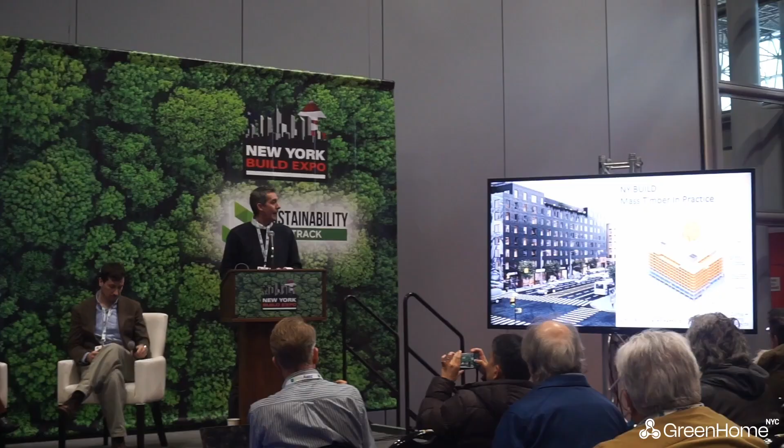My name is Matt Melody. I'm an architect with Curtis and Ginsberg Architects here in New York City. We focus on designing large-scale multifamily housing in New York City and the surrounding area. We specifically focus on affordable housing and really high energy efficiency passive house building design.

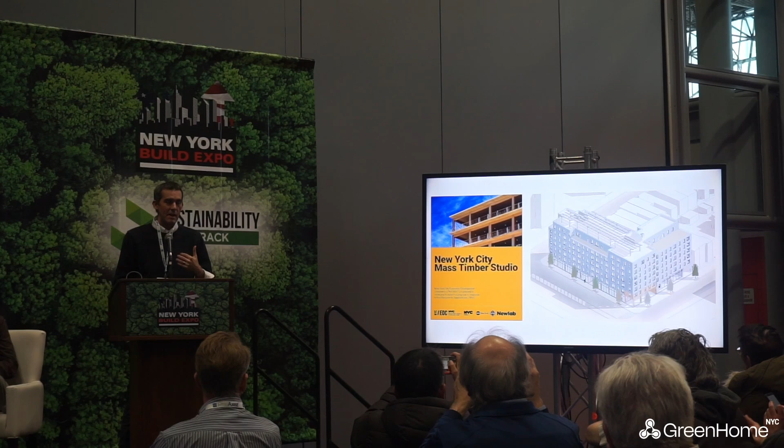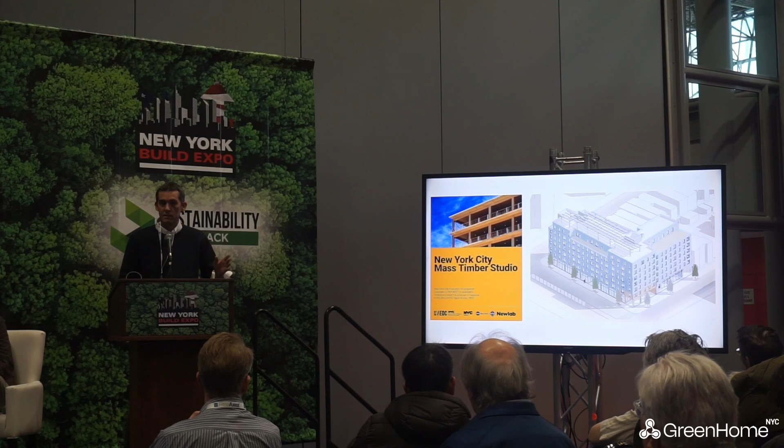So we got interested in mass timber because, like was mentioned on the previous panel, and I think even the panel before that, passive house design creates a real reduction in operational carbon, but we weren't finding a way to reduce embodied carbon. So we got involved with the Mass Timber Studio that EDC put on and did a study of how to design a new 100% affordable housing building out in Jamaica, Queens. And I'll walk through the things that we learned along the way, how you can design these sort of large-scale multifamily buildings in mass timber.

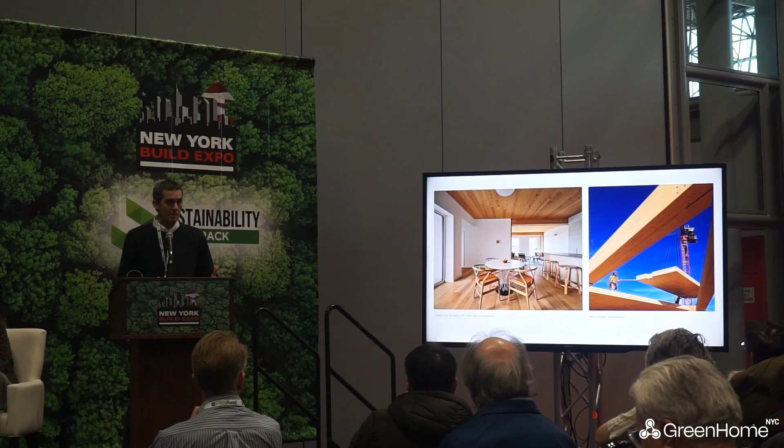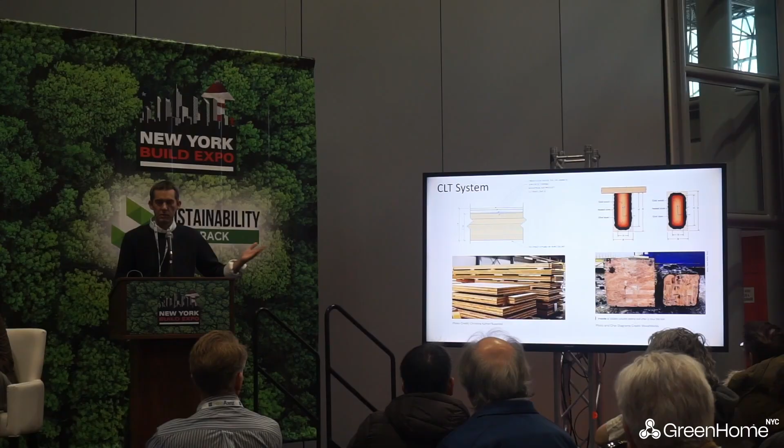So, like I mentioned, mass timber comes in a variety of flavors. We focused on cross-laminated timber, that you see in the image on the right here, and glulam options. So CLT effectively is like gigantic plywood, right, of dimensional lumber that's all been bonded together. And then glulam, we all know what glulam is, columns and beams out of that.

So when you're designing a large-scale building out of mass timber, you have roughly 3 general approaches to the structural system. You've got post and beam, which is glulam columns, beams, and then mass CLT floor panels. You have an all CLT system, which is the walls and the floor are all CLT mass timber, or you have a point supported system, which is glulam columns and then CLT slabs spanning in 2 directions.

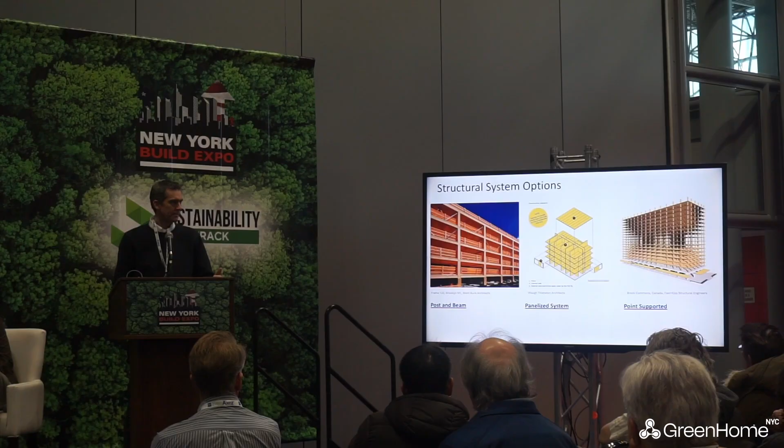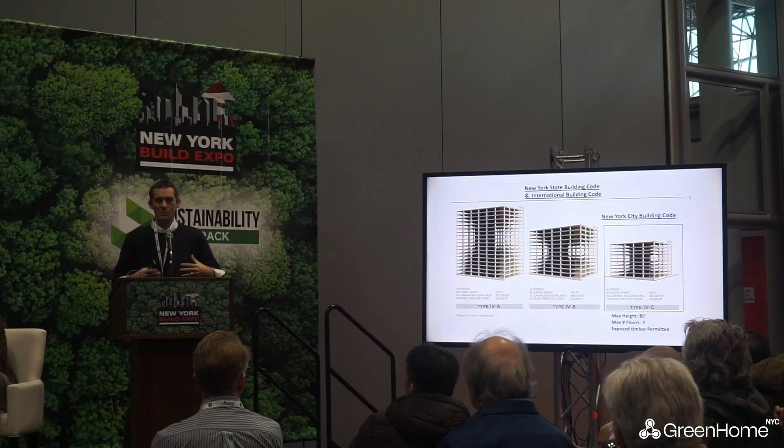New York City Code, as I mentioned, currently allows what is effectively a modified type 4C construction. So we can get up to 85 feet of mass timber, 7 floors within that. The International Building Code, the new New York State Building Code, allows for a bit more height variation in mass timber, but for New York City, we're a little more dense, so we're a little more conservative on it currently.

So, when designing the building out in Jamaica, Queens, we maxed this out. We have a cellar, parking, and ground floor commercial that is cast in place concrete, and then 7 floors of mass timber up above that.

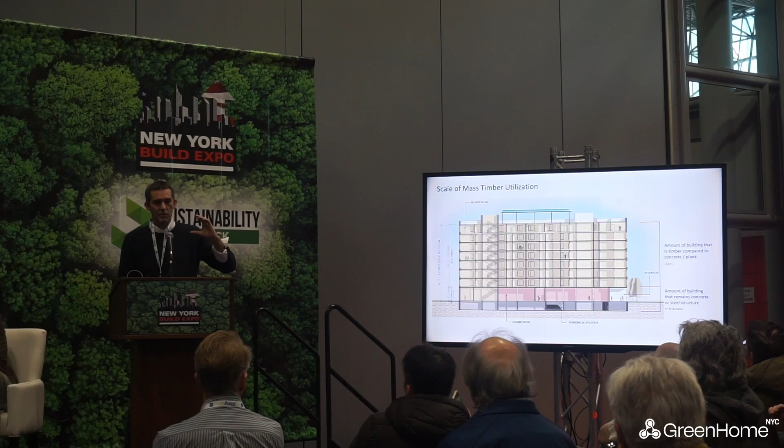I'm going to pause a minute, and since we focus on affordable housing, I'll give a little intro on how affordable housing design works and how that integrates with mass timber. In New York City, affordable housing is governed by the Housing Preservation and Development Agency, HPD, and they have some very specific design guidelines that go above and beyond regular building code. So, props to HPD, they do that because they want to make sure that affordable housing is also good housing.

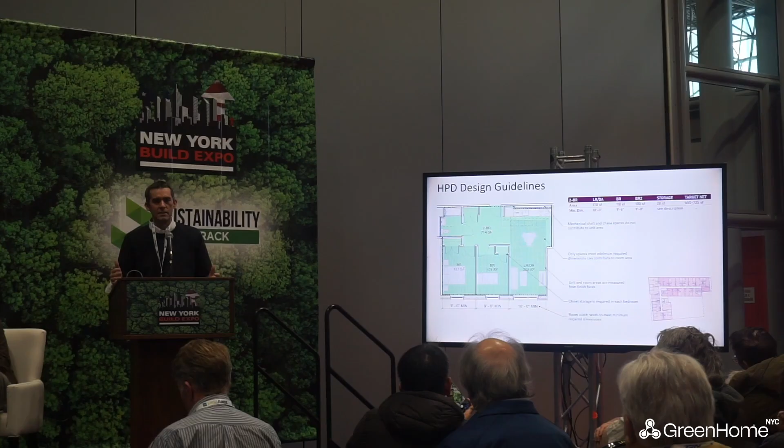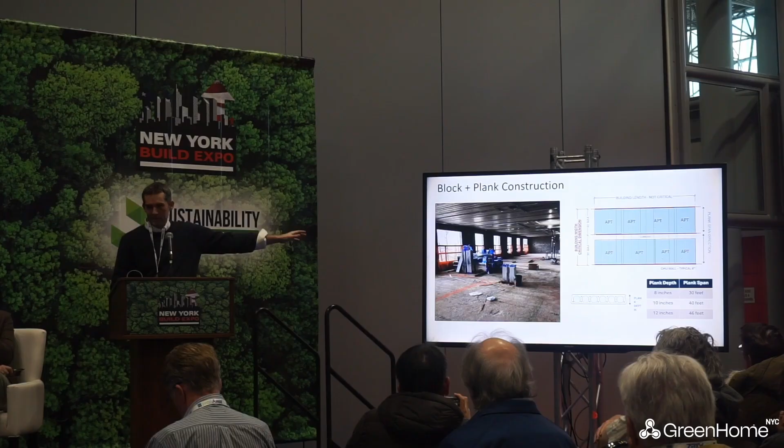We have very specific room dimensions, areas, and unit areas to make sure that the apartments are really livable and right-sized for families. So we have to meet all of those design guidelines in addition to building code. A lot of affordable housing in New York City is built out of concrete precast plank structures with CMU walls. So you have these big, column-free spans throughout the building, and that's sort of what the design guidelines are based on. So they're not used to dealing with a lot of columns.

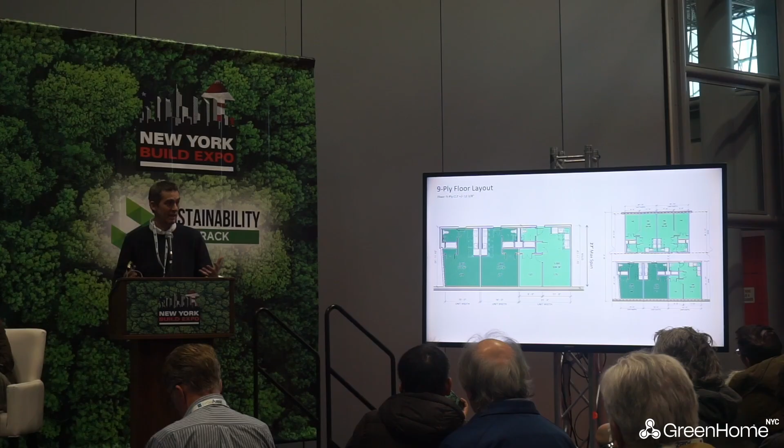So, you're going to design an affordable housing building using CLT. The first system we looked at is a 9-ply CLT system, so the thickest you can get. It's got a long, roughly 27-foot span, very similar to the precast plank approach. We could fit the design guidelines, the apartments fit out perfectly fine within that. The only consideration is that 9-ply CLT is not all that standard, not all the suppliers provide a 9-ply system, so we were somewhat limited in who we could go to.

Another option is a 7-ply CLT system. It's a thinner CLT panel, the span is not quite as long, so we flipped that and spanned that between demising walls, and it works out pretty well for 1-bedroom apartments in an HPD design guidelines setting. When we got to the larger apartments, the 2 bedrooms, the 3 bedrooms, the span limitations weren't really working with us, so we started to run into some inefficiencies and conflicts there.

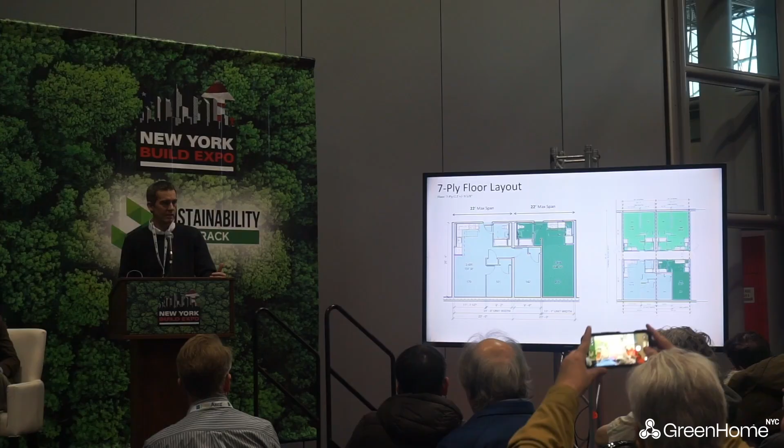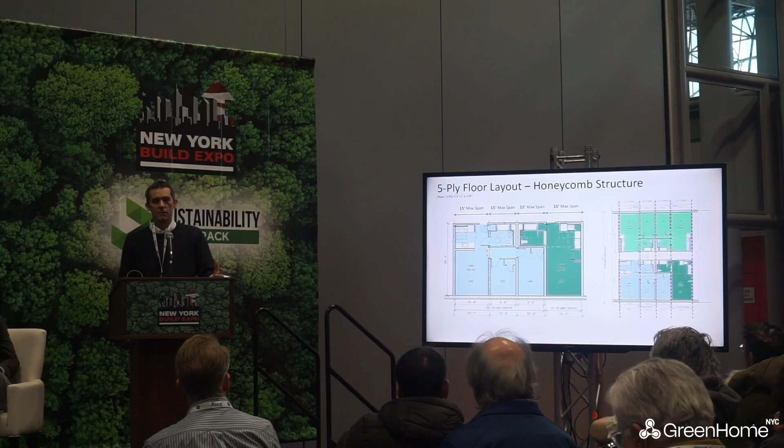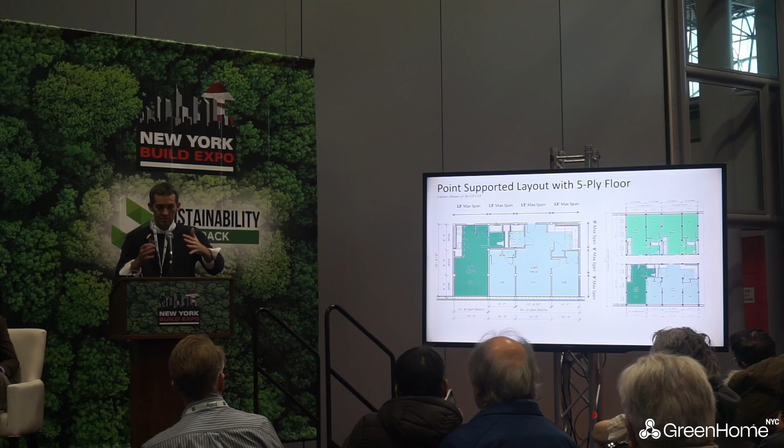We tried the all CLT 5-ply system where all the walls and the floors are all CLT. With this one, the rigidity of it and the short span spacing doesn't work quite as well for affordable housing and the room dimensions that we have to meet. The last one that we looked at is the point-supported system, so just the glulam columns and the CLT floor plates. This one has the shortest amount of span available in the system, but it works out reasonably well with the design guidelines items.

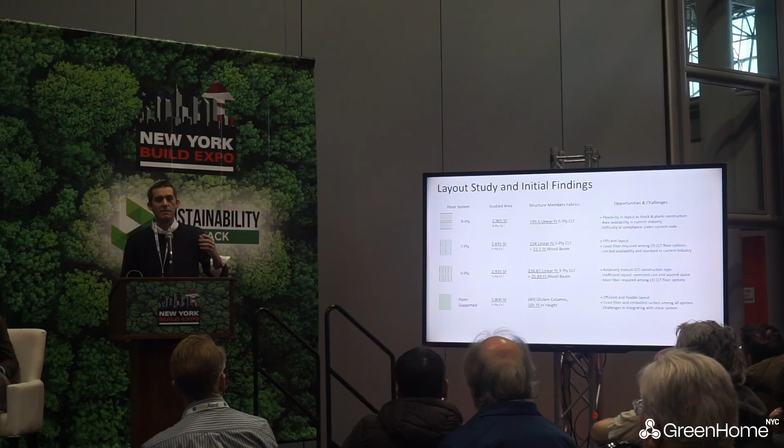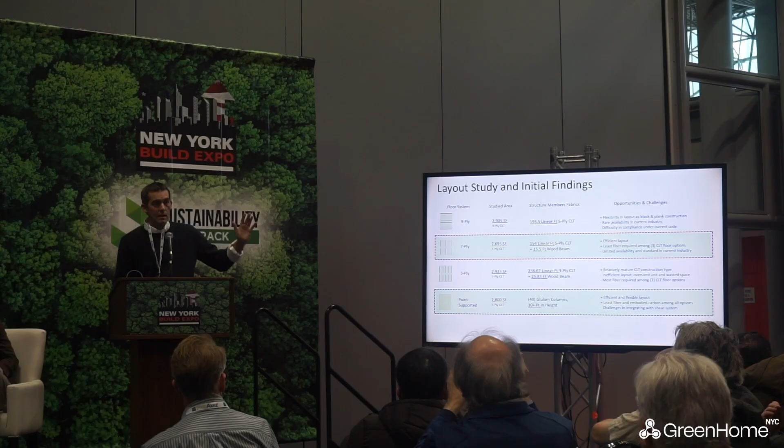So we analyzed all of those along with Merrill Happel, who was a partner on this, to see which of the systems had the least amount of wood fiber in it. When you're designing mass timber buildings, more wood fiber means more embodied carbon means more material cost. So if you can keep the amount of wood fiber low, you can keep the cost and the embodied carbon down. Of those, the 7-ply system and the point-supported system had the lowest amount of wood fiber, and the Goldilocks option was the point-supported one, since that had the lowest amount of wood fiber and works the best with the design guidelines.

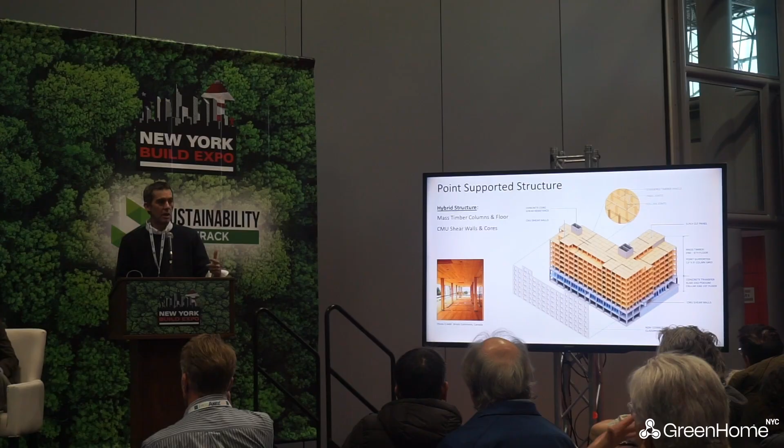So after you've picked your system, extrapolate that out over the entire building design. You still need to factor in that we currently can't use mass timber in your lateral resistance frame. So your shear walls, your stair cores, your elevator cores are all still going to be non-combustible concrete, CMU blocks, something like that. So we end up with a hybrid system each time.

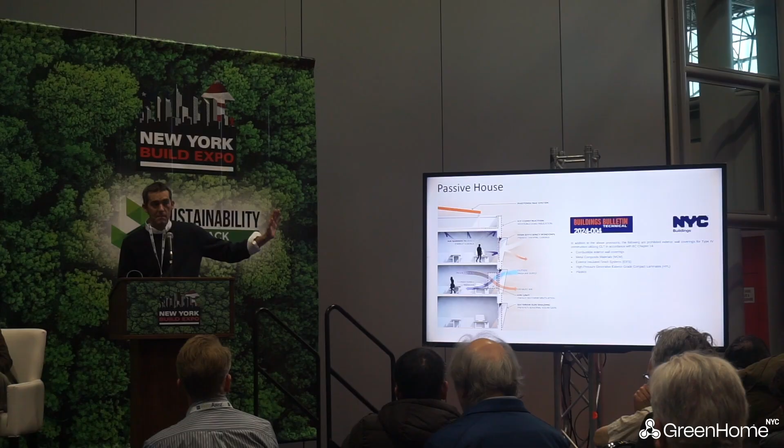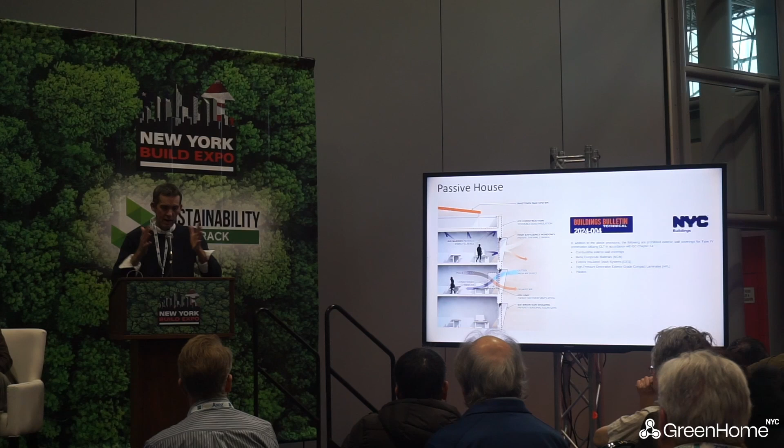I'll talk real brief about Passive House. I think Eric's going to talk some more on it. Passive House and mass timber go hand in hand. You get some good benefits because your thermal break systems can be somewhat reduced, because timber has lower conductance than, say, metal or concrete systems. The one trade-off is that in a mass timber system, we can't use high R-value foam plastic insulations. So you end up with an all mineral wool insulation system, so your exterior wall assemblies get a bit thicker.

In the end, we found that we were getting about a 30% embodied carbon reduction compared to a regular block and plank building, and that's before even counting savings from the foundation reductions. So all that to say, on Gizem's point, the best option we have right now for reducing embodied carbon is through building with mass timber. And the more that we can do it, the more people will get used to it, the cost will hopefully start to come down, and we can really build this at scale.

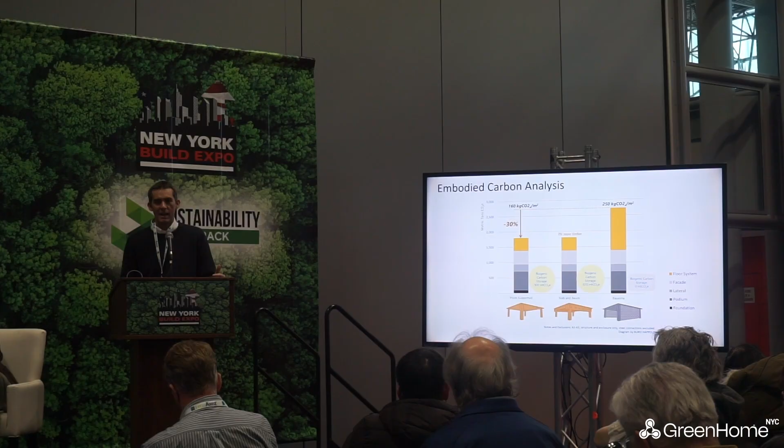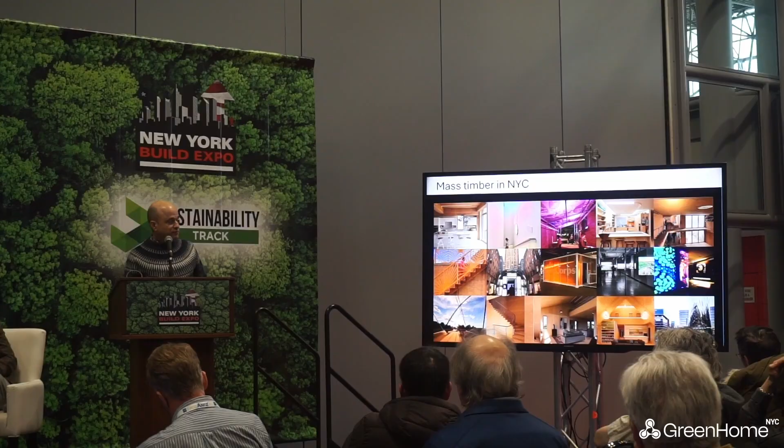I'm an architect and principal at Mesh Architectures here in New York, where our office is in Brooklyn. And we've done a lot of different kinds of projects, but for the past 6 or 7 years, we've been really focusing on mass timber projects. Pretty much for the same reasons you've been hearing. It's made out of plants, it's renewable, it's beautiful, it makes people feel good, and it has a lot of other benefits as well.

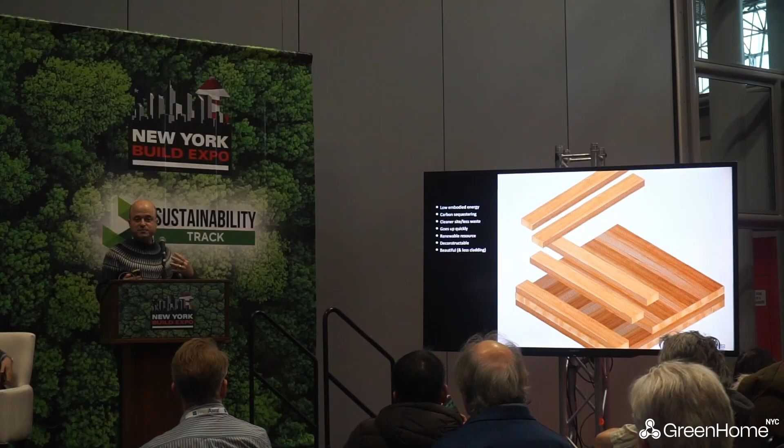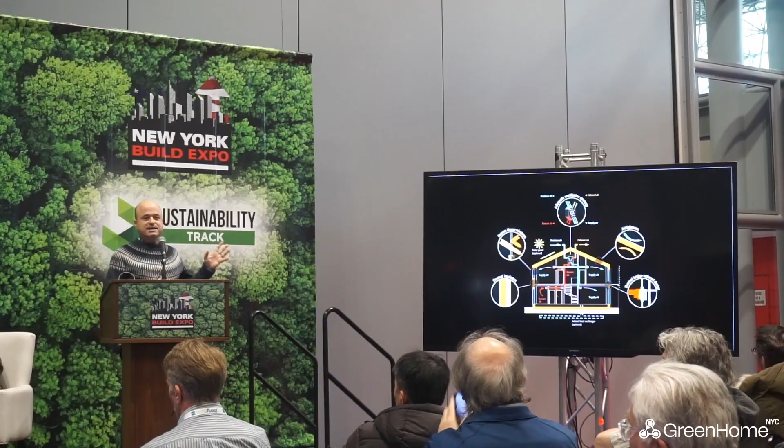So, as you know, one benefit of using mass timber, like CLT, is low embodied energy, sequestering carbon, and it's renewable, it goes up quickly. And so we decided to jump in the deep end of this pool and do some building in it. One note is that, as Matt says, it goes really well with Passive House design and the principles of Passive House.

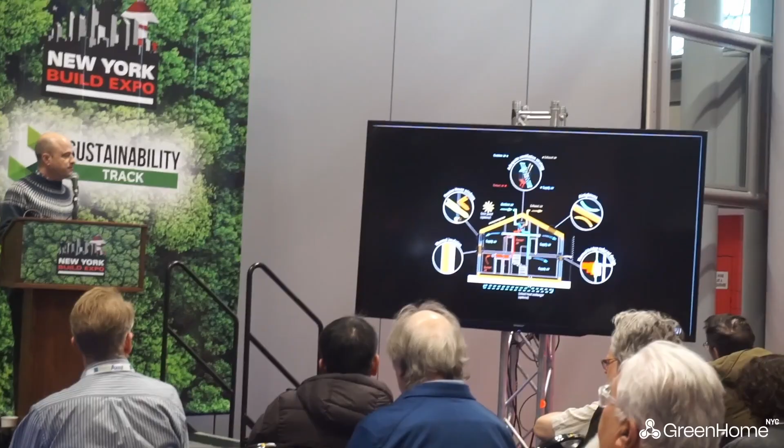Wood is already not a thermal bridge like concrete and steel are, but it is a kind of insulation. It's not as good as the insulations we normally use, but it's pretty good. And the ethos of building in mass timber and Passive House really go well together, so they just kind of reinforce each other.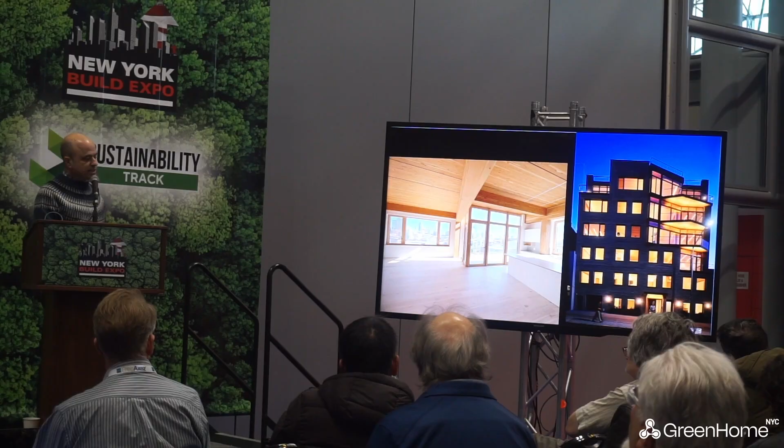This is the first project that we built in mass timber here in Brooklyn in Park Slope. It's called Timber House, and it is a glue laminated timber plank and glulam post and beam construction. And it was our first foray into this, and it worked out really well. I can tell you a little bit about how that went. So that's a little section of the building.

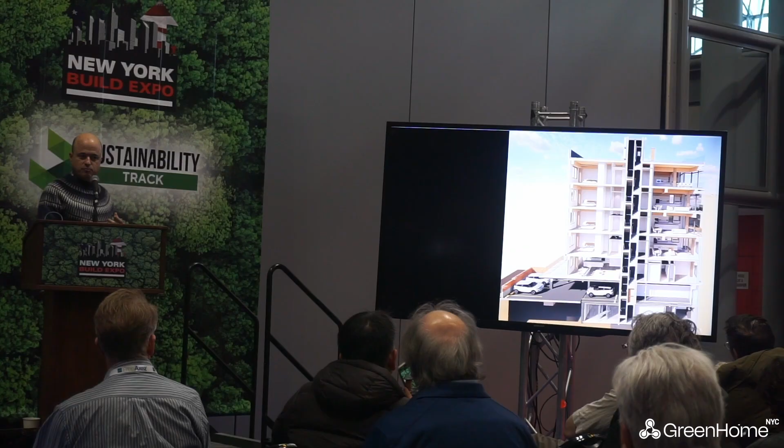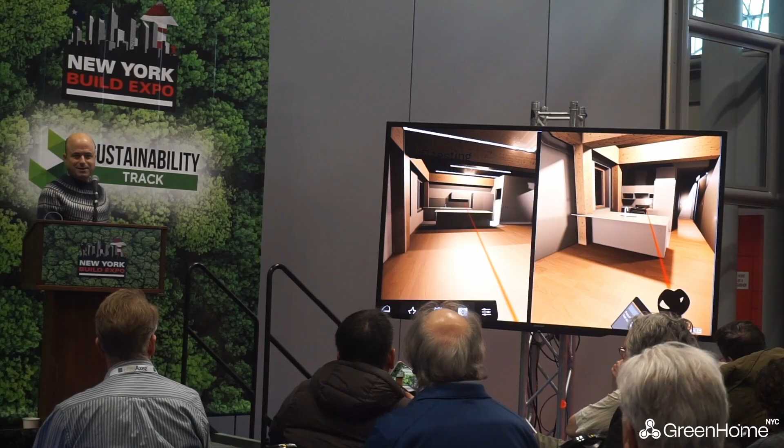You start out by building a very accurate model of the building in Revit. Having an extremely accurate model ensures that the wood that shows up on site will go together perfectly. Then we test the inside of the buildings using VR. This is actually from like 6 years ago. It looks a lot better now, but this is something we do to really understand the spaces we're building. Again, with our very accurate model, we can check out everything from the inside.

One thing that's super important is that there's a lot of coordination before you build. A lot of your work with mass timber is all done in advance. So this is penetration coordination. These are all the mechanical, electrical, plumbing penetrations. Those are all cut in the factory, and the planks all come pre-cut for services to go in. So there's a lot of time spent making sure that you have all the right locations for all those penetrations.

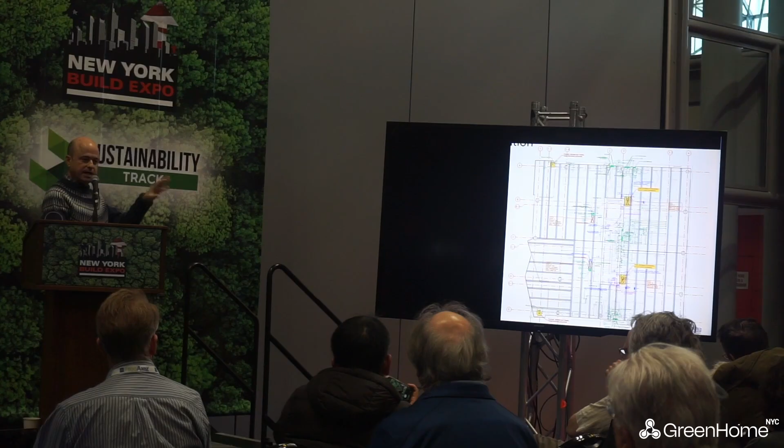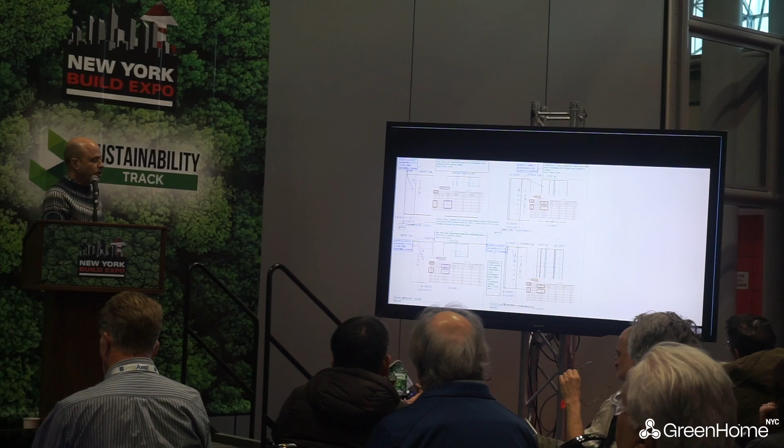Similarly, shop drawings are really important for determining the connections. Again, everything is established in advance, so when it shows up on site, it just goes together. So there's a lot of time in advance while your foundations are going in, coordinating all of these planks and beams and columns, making sure they're set up properly. This is what some of the connections look like. They're very specialized connections made for mass timber.

What that means is that when everything shows up on site, all you need is a small crew with screw guns and a guy in a crane to put the whole structure together, which is extremely satisfying because everything goes in very quickly, without a lot of waste, without the mess of concrete, and you just have guys assembling the whole thing as if they're putting together IKEA furniture.

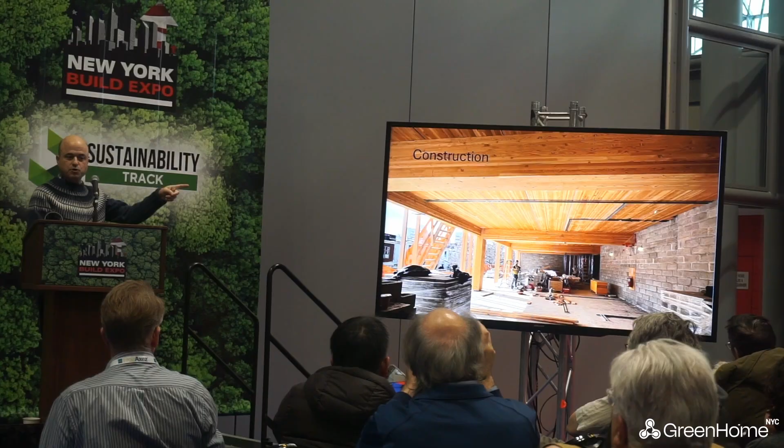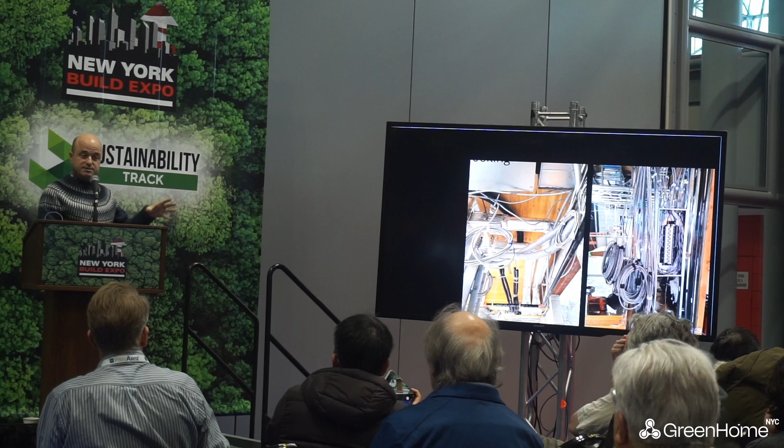This is again a shot of how it looks going in. We do have a CMU core. You cannot build your core out of mass timber in New York City. Now, we reveal all of our nice wooden ceilings throughout the building. So what that means is that all of your services, your sprinkler, your plumbing, your electrical, your ducts, all your ERV ducts, all that stuff gets put into very small spaces.

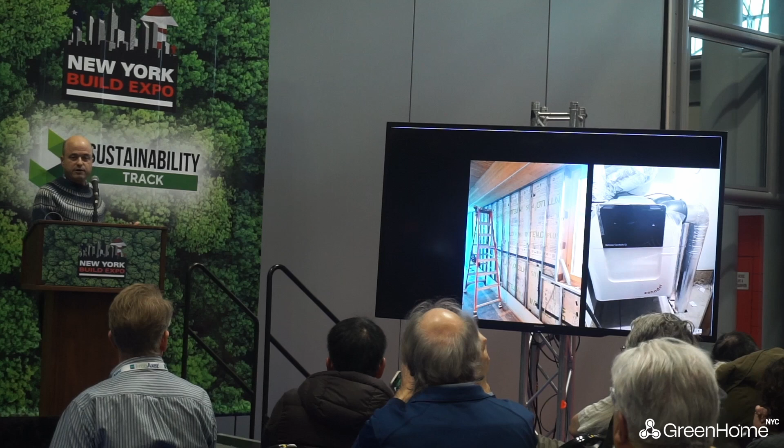The code also asks for very few concealed spaces in mass timber buildings. So everything gets jammed into very small cavities and is very close together. That also needs to be coordinated. We, of course, have air sealing. You can see on the left, that's what the air sealing looks like. We have ERVs, which are providing fresh air constantly to all the spaces and exhausting all of our stale air, which makes for a very healthful and pleasant environment inside the spaces.

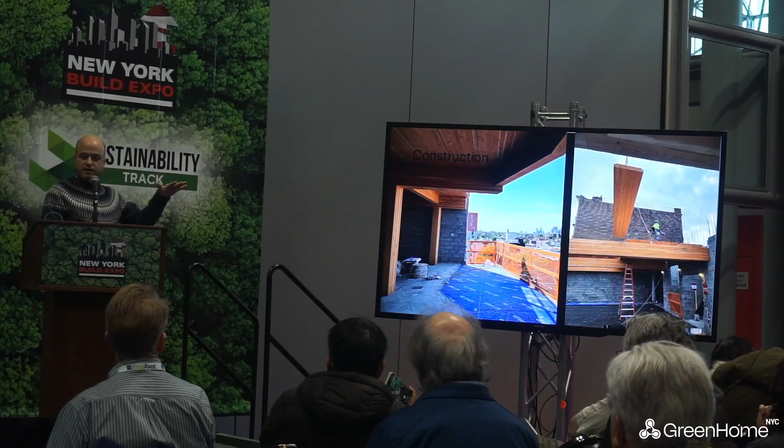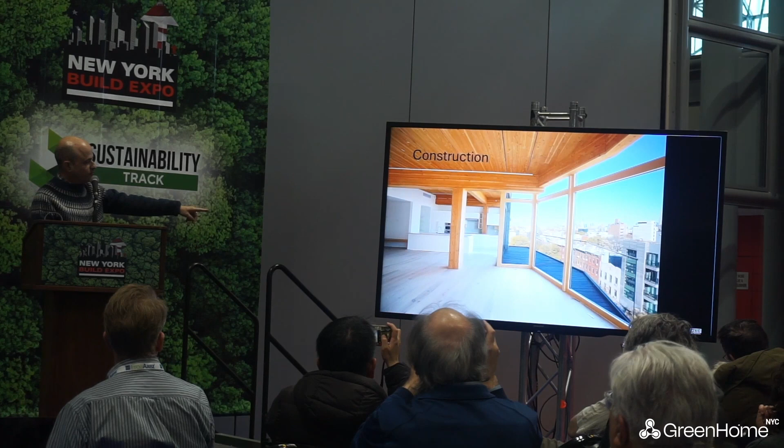So here's what it looks like going in. You see a concrete surface there. That's not a concrete deck, as you might expect. It's a very thin concrete surface that we put up on top. That's part of the fire-resisting assembly that we have, and it also helps with acoustical control. And there's the final space of the same one, before and after. And so you can see everything is finished there.

This is a time-lapse video of everything going up. So you can see how we have our beams and columns going in, the planks going in on top of those. Then we have that concrete surface I mentioned going in. You can see the whole thing getting erected here. We have a concrete firewall on the sides that's made out of CMU.

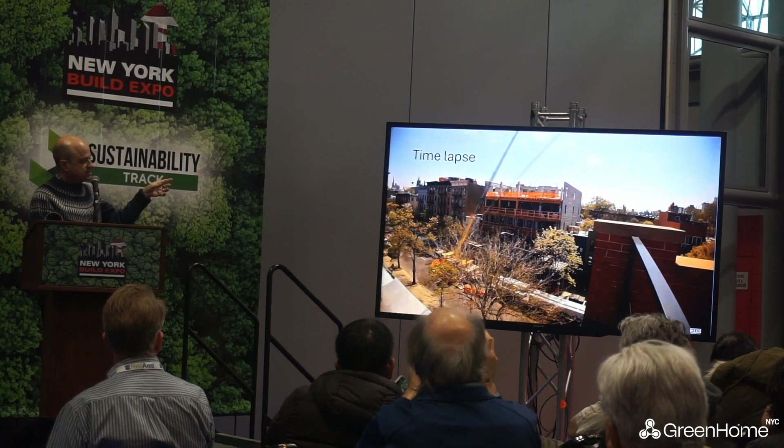Again, we cannot use mass timber in our fire-rated exterior walls there. So we're putting everything up, and it's going to top out very quickly. You can see it goes in extremely quickly in this video, but it actually does go in quite quickly. It would take about a week to do each floor in timber, then a week for the concrete that you see, and then you repeat the process the following week.

And these are the final kind of finished pictures. You see the wood is exposed, which is great for the feeling of being inside this kind of natural environment. Everybody really loves being in these spaces. And then the outside is clad in these handmade Danish bricks.

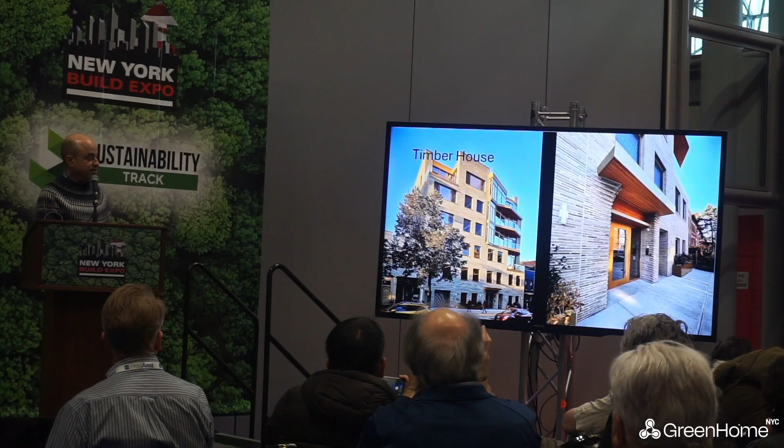This is a project that's going in right now in Williamsburg, also here in Brooklyn. And this is a single-family house that's made also out of glulam beams and columns and CLT partitions. So you can see how it goes in here. You just have a crane and everything gets dropped into place. On the right is taken about a week and a half ago of how it looks right now. The structure went in incredibly quickly, again, once we set everything up.

And this is just a video of one thing that's tricky: if you're working on a small street, like we have here in Brooklyn, I mean, not where you're at here, but you get the point. We have these large pieces that have to come in on a truck and get craned in. And this piece has already had its membrane adhered to the outside of it, which is going up against another building. So you can see how it comes in here. But you don't need a big crew, it just goes in and gets screwed into place.

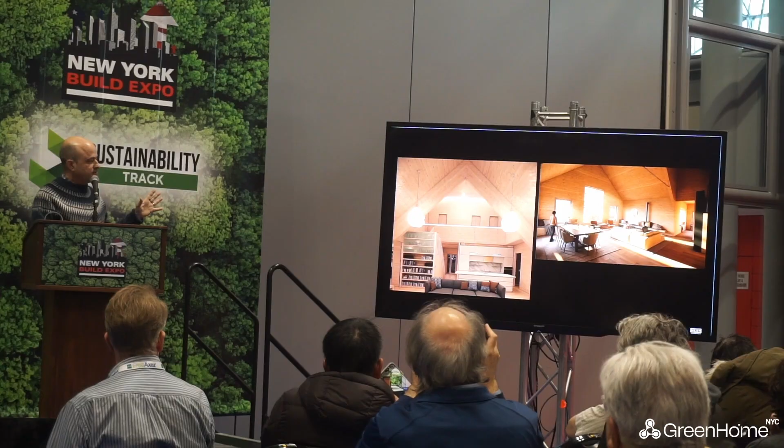Then we're also doing some projects upstate where we're doing houses, and this gives you a little more latitude. We're not working in very constricted Brooklyn spaces. And you can see how CLT also gives you an opportunity to use it for architectural expression. You get to cut these shapes and make a lot of different kinds of forms. So it's both practical and beautiful at the same time.

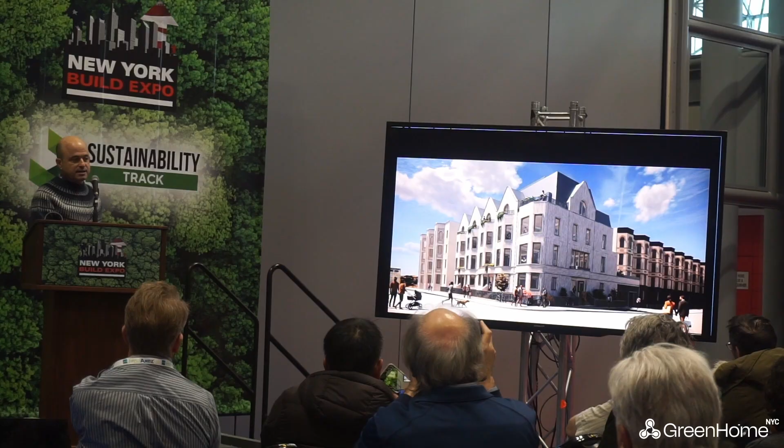And the last project I'll show you is one that we're planning right now. This is a row of 5 houses. This is the one that we did in the EDC's Mass Timber Studio. And it's going to be 5 houses in a row, and they're single-family houses. You get these really beautiful interior surfaces made out of natural wood, and you get all kinds of different feelings for these spaces. You're doing a wood stair, and there's a lot of opportunities for both practical and aesthetic experiences. So it gives you a sense of that.

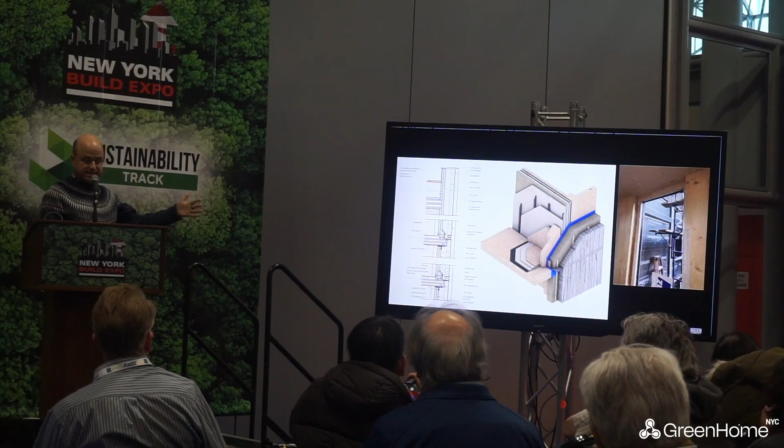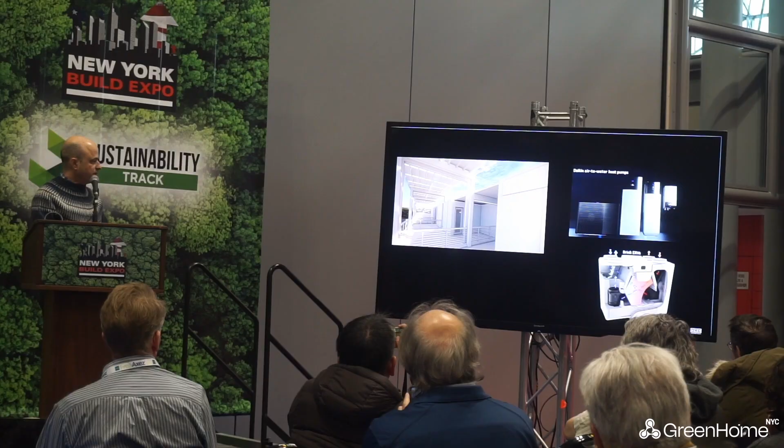The way we insulate our buildings, we have a very thick envelope, as Matt was describing. We have mineral wool on the outside. We have CLT walls, but they're panels, and they're not allowed to be load bearing on the exterior of the building. And then we have a CMU core for lateral forces. We're using very sophisticated air-to-water heat pumps, ERVs, and solar for energy generation. These are the Brinks, the same ones we use in Timber House.

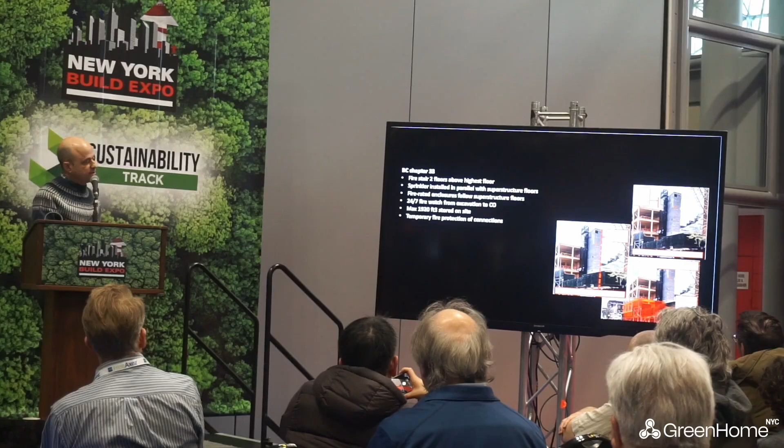And I want to just talk briefly about some of the obstacles that we face doing this in New York City. One is the Building Code Chapter 33, safeguards during construction. There's a lot of restrictions that make it difficult to build. And these are things I think will be worked on in the years to come to make them a little bit more friendly to doing these projects. But right now, there's a lot of restrictions that you have to be mindful of.

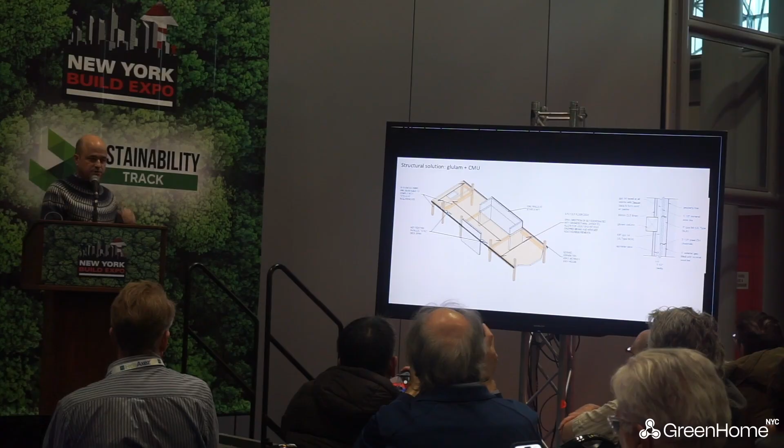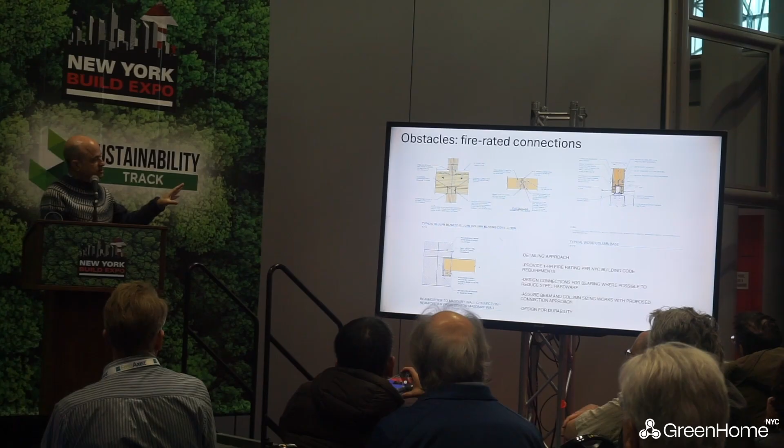Another thing is that lateral systems cannot be made out of CLT in New York City at the moment. We hope again that will change in the next iteration of the code. But we have to use CMU as our lateral system. And all of our connections, normally you think of steel connections in New York City, have to be fireproofed with intumescent paint or some other kind of spray-on fireproofing. In timber, it has to be done with wood. So that's another thing you have to be mindful of.

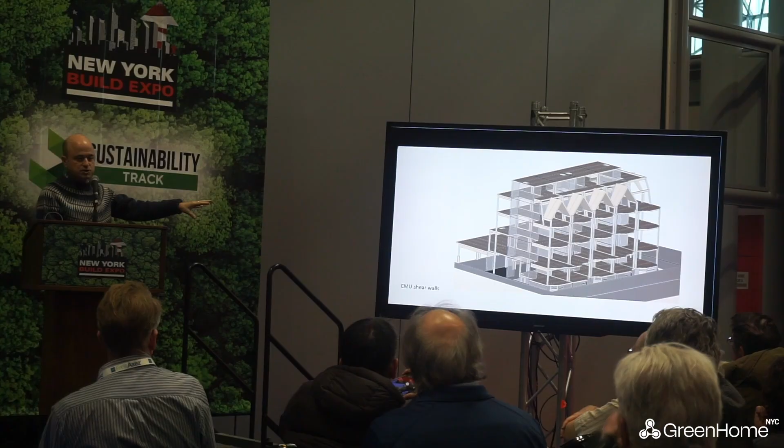So this shows our structure with the CMU. If I make that transparent, you can see the combination of the post and beam construction with the CMU construction for lateral resistance. And we do save a lot of global warming potential. The embodied energy is great here. In the structural engineered analysis, it's 20 or 25 to 30% from baseline.

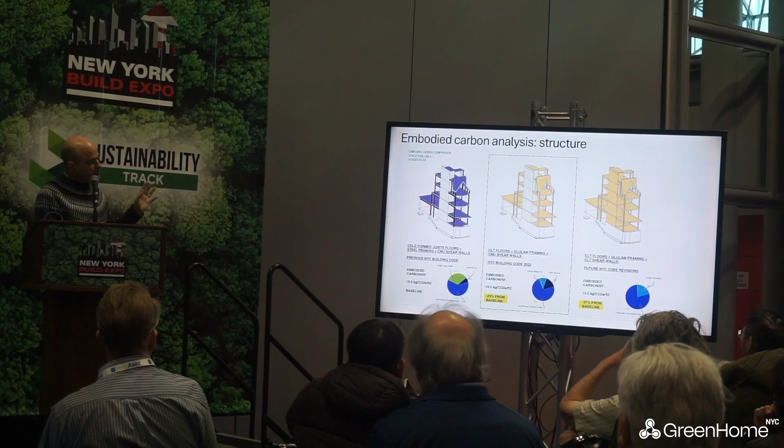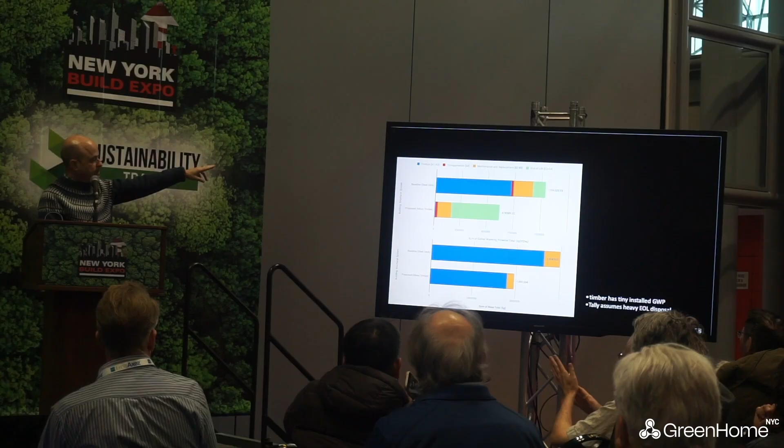When we put it through Tally, our whole model, which includes also using not as much sheetrock, not using as many finishes that you normally use, the GWP is a lot lower compared to the baseline using mass timber. And that's it.